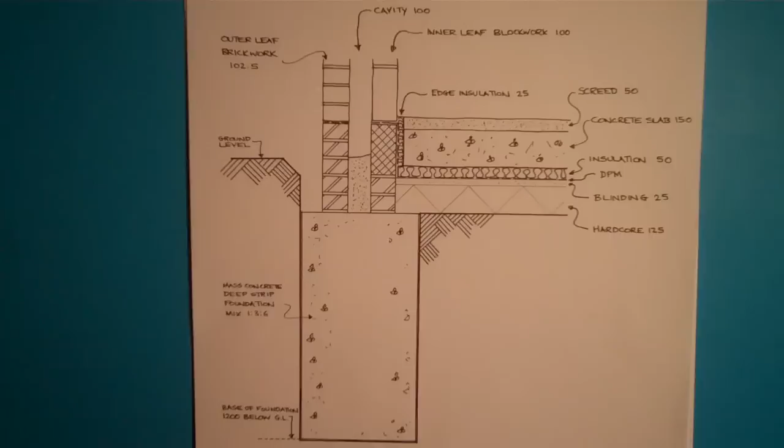Okay, I'm going to show you how to draw a construction detail which includes a strip foundation with a ground bearing solid concrete ground floor. It's going to end up looking something like this, but we're going to start off with a blank sheet of

paper, and the equipment that we're going to use, simply a scale rule, a pencil, a pair of set squares, and I'm going to use an ink pen later on just to ink in to make it clearer to view. It's also good to have a decent eraser to hand just to rub out pencil guidelines and so on.

So we're going to start by very simply drawing a horizontal line which is going to represent ground floor level. Now, set squares come in very handy for something like this because it's quickly possible to draw a nice horizontal line which is perpendicular to the edge of the sheet of paper.

So we can simply line up the edge of the set square with the edge of the paper there, and by sliding the set square up and down we can very easily draw a nice straight horizontal line. So that line effectively represents ground level. Now, for the purposes of this exercise, I'm going to assume a strip foundation 500 millimeters wide. So we're going to draw this to a scale of 1 to 10.

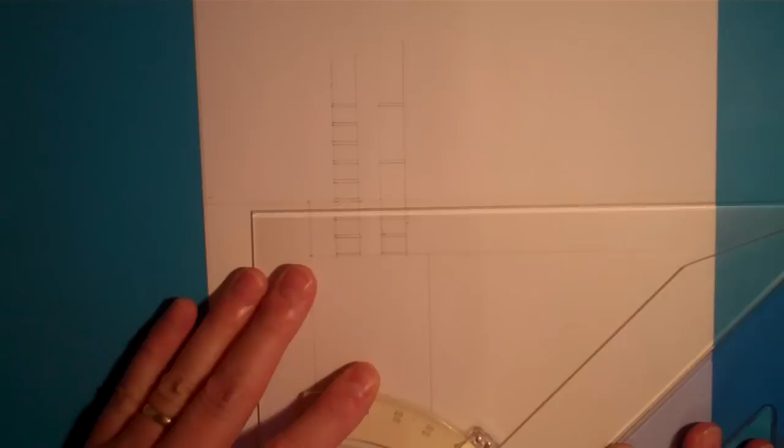From the point at which we strip the topsoil, I'm now going to add in a bed of hardcore, and I'm going to say that that bed of hardcore is 125mm deep and has got a 25mm blinding on top of it. So in total it's going to be 150mm made up of 25mm blinding and 125mm of hardcore. So we can draw in another horizontal line across there, like so, and there.

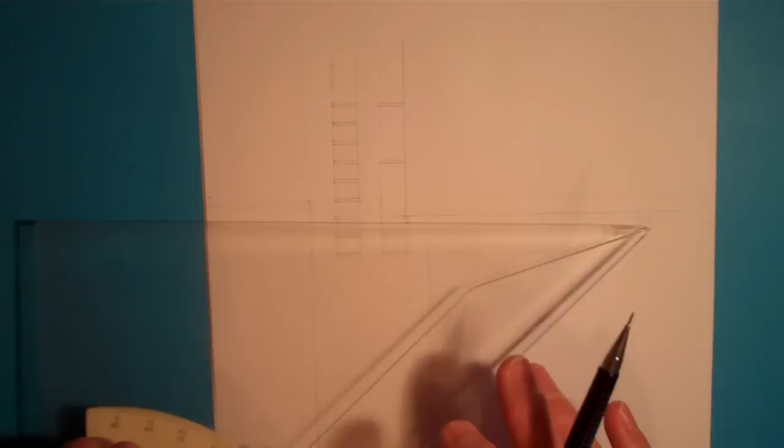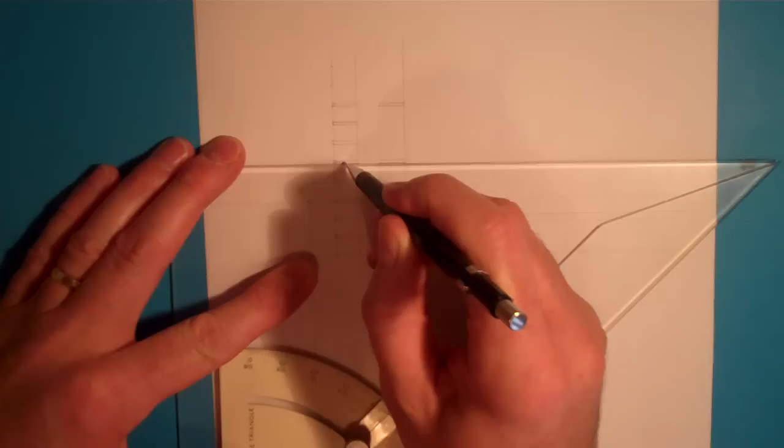Sitting on top of that we will have the damp-proof membrane. Now the damp-proof membrane needs to lap with the damp-proof course in the walls. Damp-proof membranes and indeed the damp-proof course are very thin, and we're not going to be able to accurately show the thickness of them. However, we can simply indicate their presence by a broken line. So I'm going to run a broken line through the middle of that bed joint there.

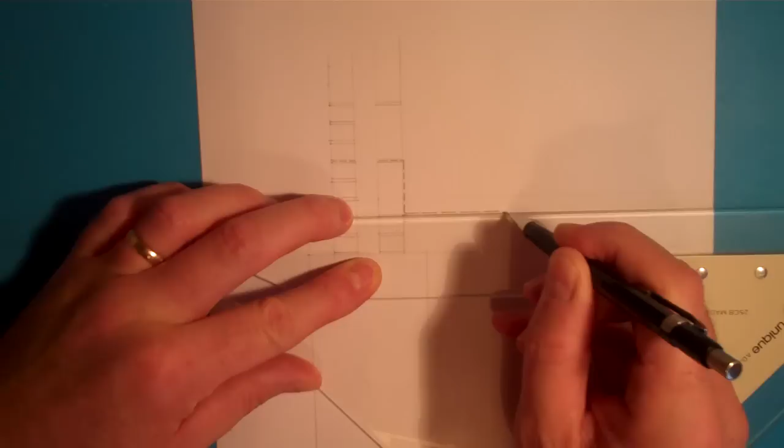So there's our DPC in the walls, and that laps with the damp-proof membrane, which will run up the wall there, and then across the top of the blinding to the hardcore. And the blinding actually provides a nice smooth surface for the damp-proof membrane and avoids the possibility of the damp-proof membrane being punctured as people walk around on the surface of it. So there's our damp-proof membrane.

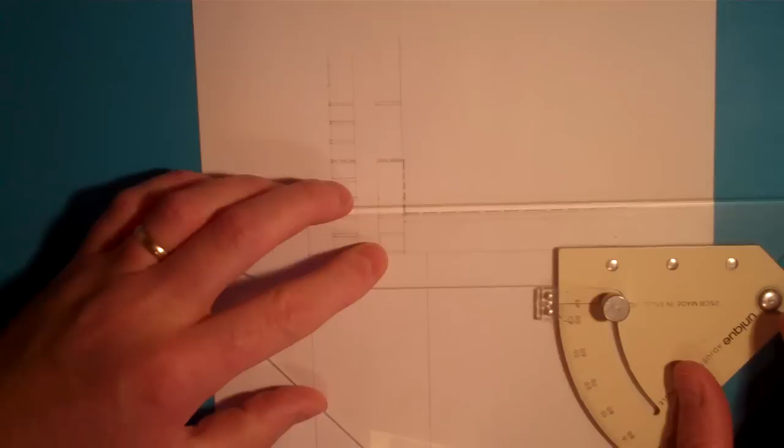On top of that I'm going to put 50mm thick of insulation. So again we can draw in a horizontal line which actually coincides roughly with our ground level line. We need to prevent a thermal bridge at the perimeter of the wall, so we should also have an upstand of insulation. I'm going to put 25mm of insulation in at the edge and draw a vertical line to represent the insulation coming up here.

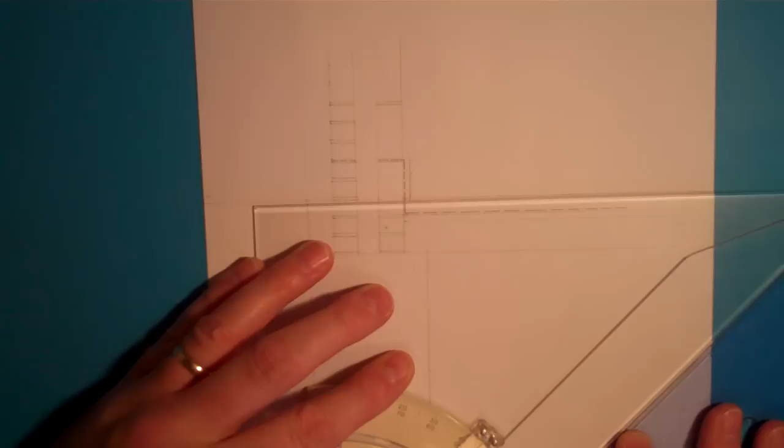And then I'm going to put in the concrete slab, 150mm thick. So I'll mark off 150mm there. And then there's going to be a 50mm screed sitting on top of that. So that takes us up to that point there. So 2 more horizontal lines. Takes us across to there. And there. So in actual fact we've now got in virtually all of our lines.

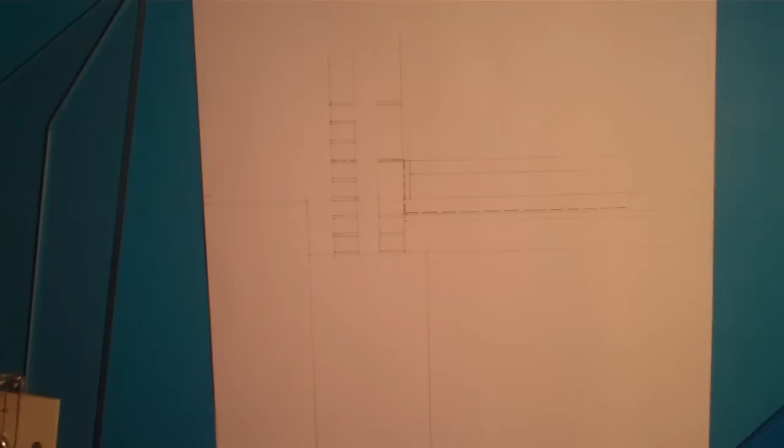We need to add in a couple of other items in between the outer leaf and the inner leaf of the cavity wall below ground level. It's normal practice to fill that section below ground level with a very lean concrete, really just a mixture of sand and cement. So we can just put in a line going across there. It's normal to slope the upper surface of that concrete fill outwards, so if any moisture gets into the cavity it's naturally drained away at ground level.

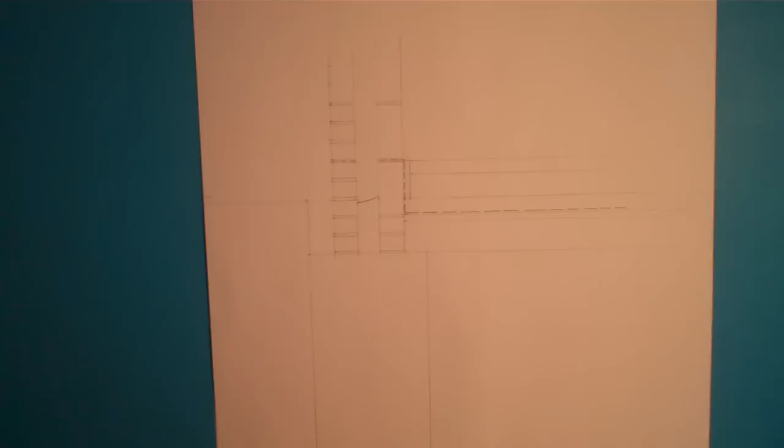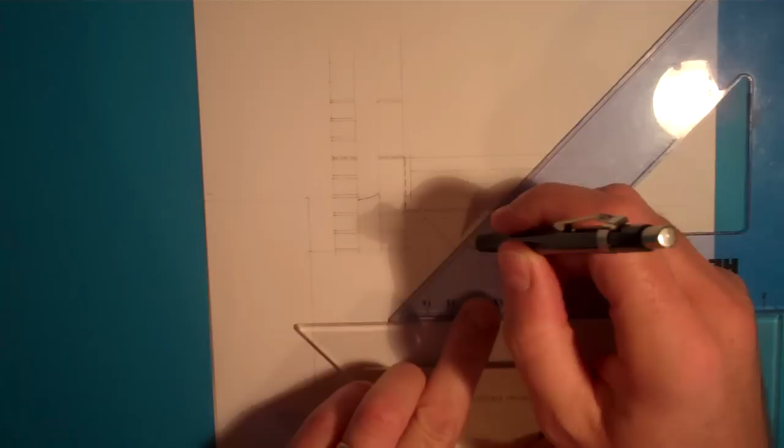And we're also going to put in a detail to show the hatching for the hardcore. There are several different ways of showing hardcore, but one of the simplest is just to do a series of 45-degree lines, diagonal lines in effect, like this. So we'll run a line up like that, and then from that point downwards like so.

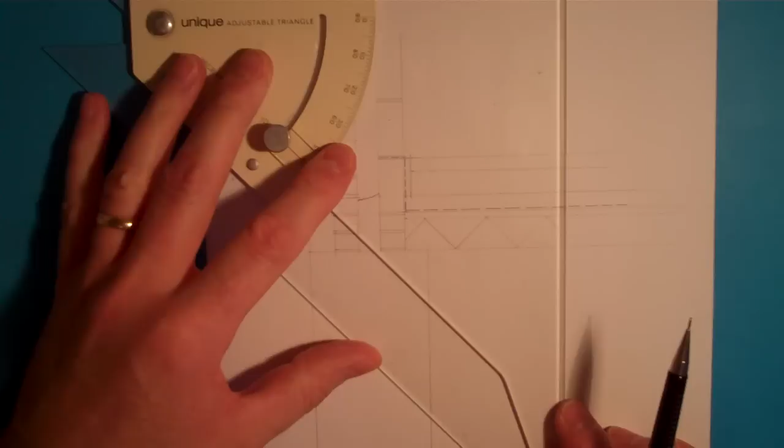Okay, at that point there I'm going to just draw a very rough vertical line coming down there, and everything to the right of that line I'm now actually going to rub out. That's going to leave me some space to add in some annotations.

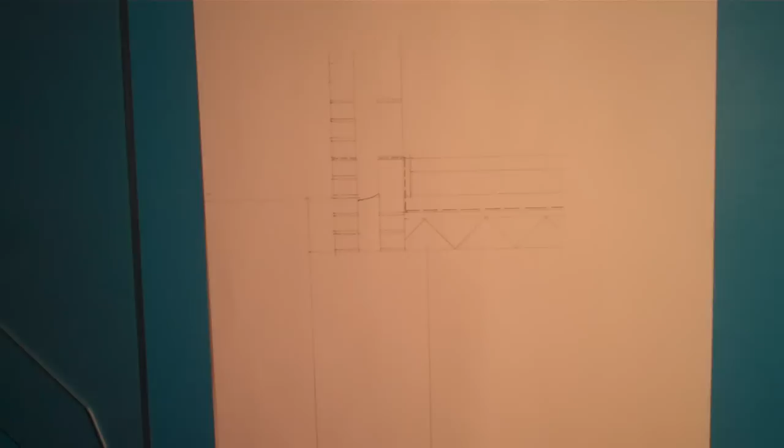And now what I'm going to do is I'm going to ink in the detail. I'm actually just going to do it freehand to save a little bit of time, but if you're not used to using ink, then you may just want to leave it in pencil, but go over it with a heavier pencil, but this will make it clearer for you to see. So here's our strip foundation.

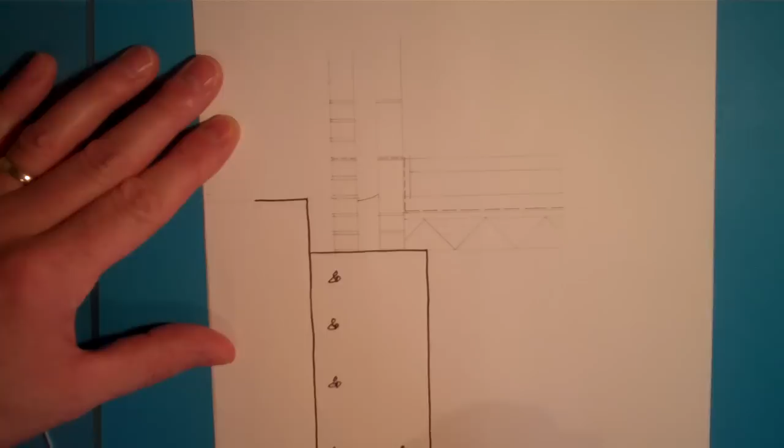Top of the strip foundation is 225mm below ground level. The graphical symbol to indicate concrete may appear a little bit random, but it simply indicates a mixture of coarse aggregate, the larger stones, and then fine aggregate. And that would be understood in most situations as representing concrete. As I say, it may look a little bit random.

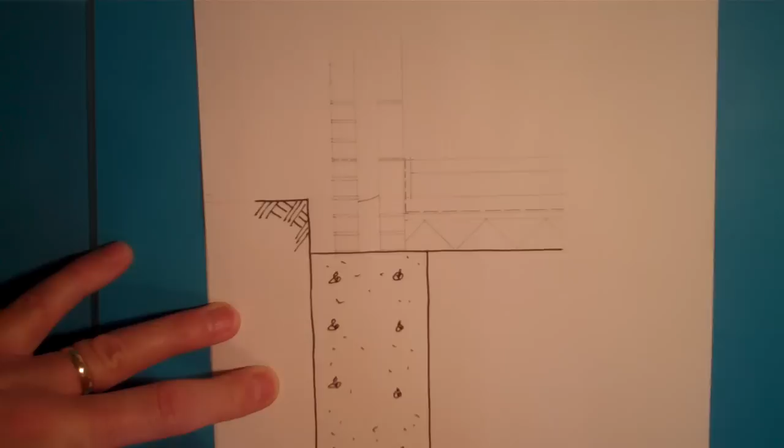For indicating the existence of soil, there is a standard hatching which simply looks like that. We can add some in down there, and people just can identify the fact that that's the soil beneath our detail.

Our wall can now go in. We'll just take it from that point there. The outer leaf in brickwork. Brickwork is 102.5 millimeters thick. We can show our 10mm thick courses like so. I say apologies if this seems rather crude, but I'm going to have to do it freehand, otherwise I'll be here all day doing it using a scale rule.

And the inner leaf of blockwork, and the blockwork courses are the same size as 3 courses of brickwork. But remember, at the base of this we've got 2 courses of brickwork, just to ensure that the courses line up. Our hardcore bed across there like that, the hatching for that, there's our hardcore, a sand blinding on top of that, which we'll just put in some dots to indicate that it's a granular material.

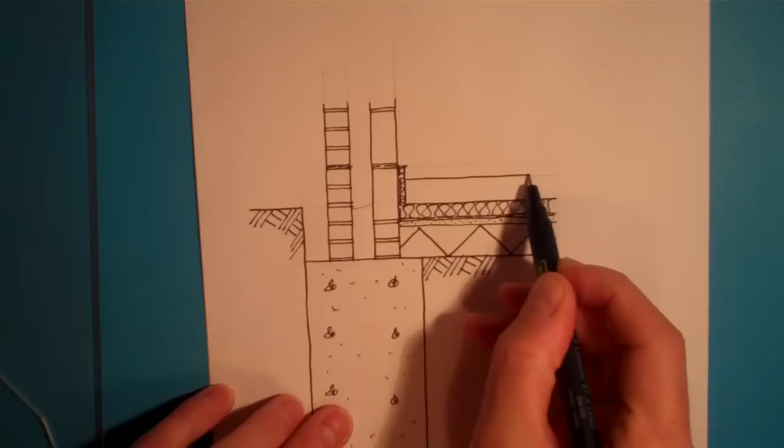Then our concrete slab, 100 millimeters thick, and the screed sitting on top of that. We'll use the same symbol here for concrete to indicate the concrete slab. And the sand and cement screed, which is literally just comprised of fine material, we'll just use some dots to indicate that. And in terms of the drawing, that's pretty much it. Sorry, I've got to add in that fill to the cavity below ground level. But that's pretty much as it would appear.

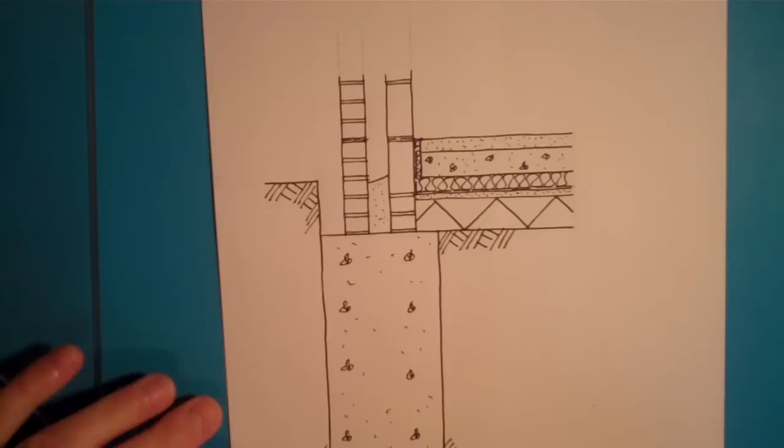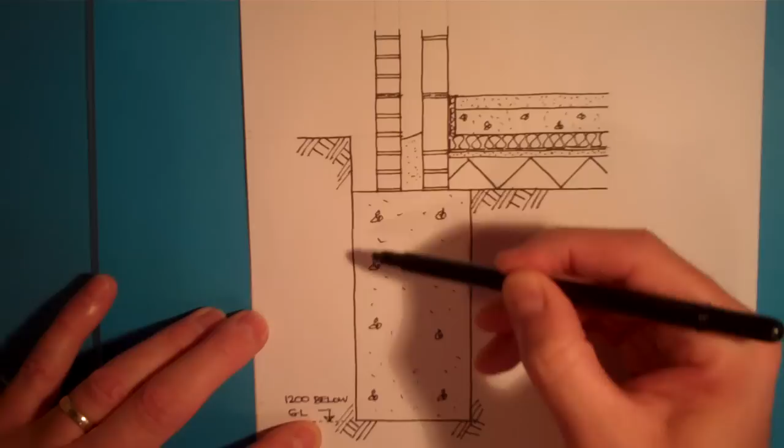I'm going to quickly add in some labels. The dimension for our foundation, the foundation we said was 1200 below ground level. I'll just put GL, a line across there, and that's the key dimension. It's not the depth of the foundation concrete itself, it's the depth of the base of the foundation below ground level. So ground level is represented there.

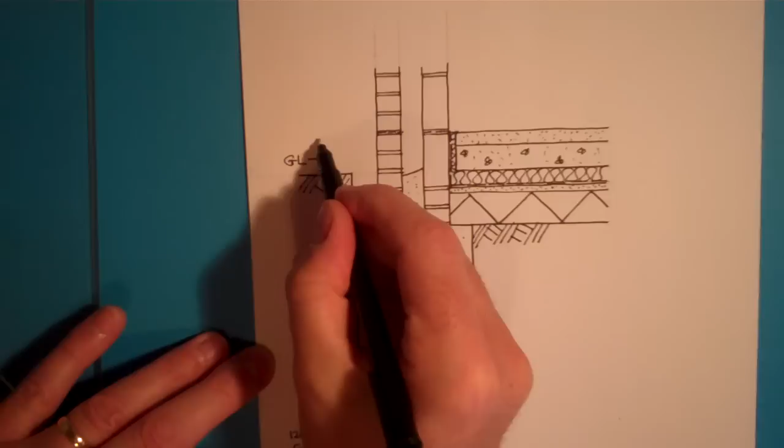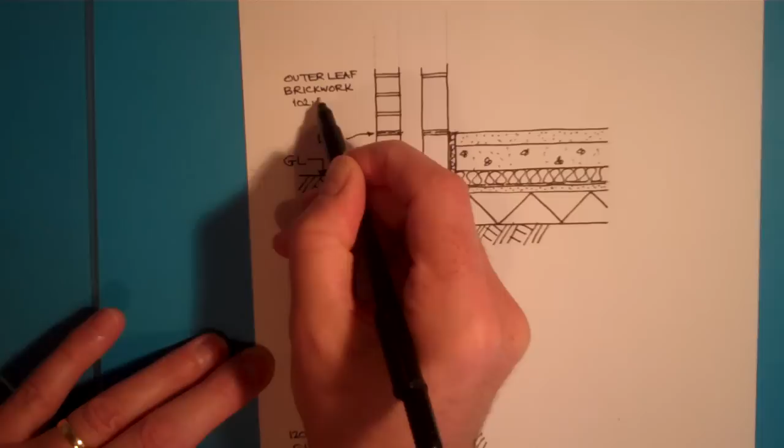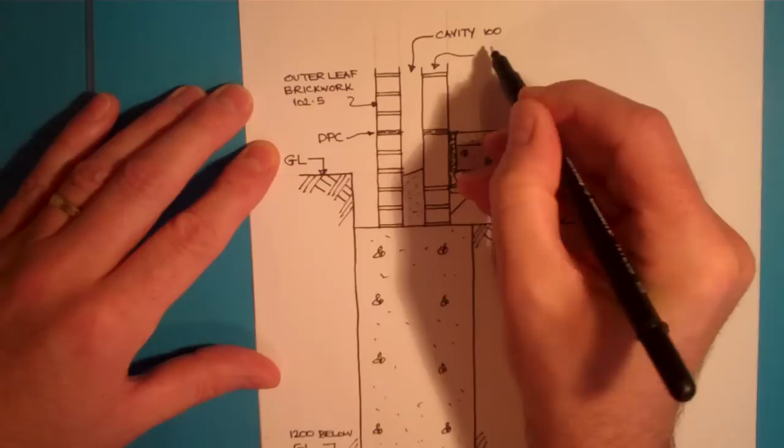We can show our DPC there. The outer leaf in brickwork, and that's 102.5. We've got a 100 mm cavity, and an inner leaf of blockwork, which is 100 mm.

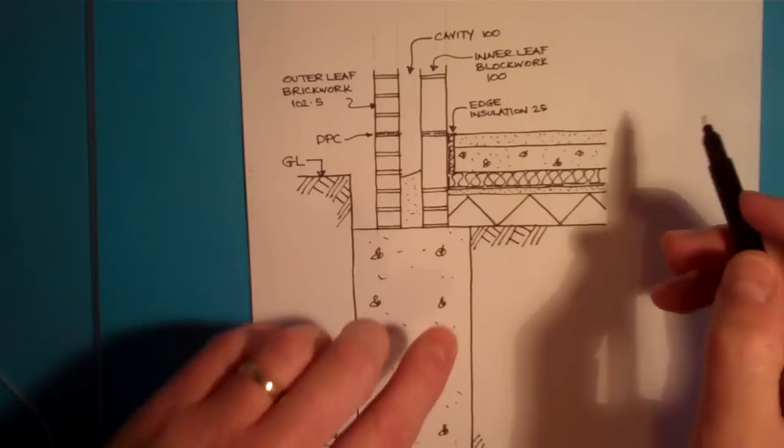We've got some edge insulation there. When you're adding labels you might want to use guidelines. I'm quite used to adding annotations so I can do it reasonably neatly, although it's not as neat as I would like because I am doing it rather hurriedly. That's our screed, which is 50 mm thick. Our concrete slab, which is 100 mm thick.

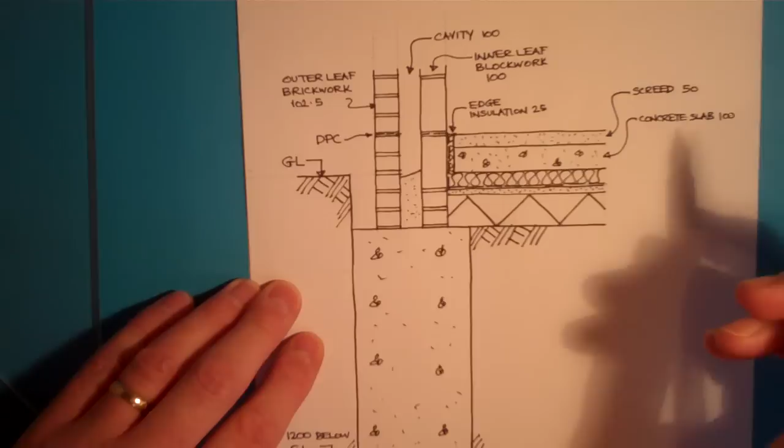Insulation, 70 mm thick. A damp-proof membrane, a 25 mm blinding, and a hardcore bed of 125.

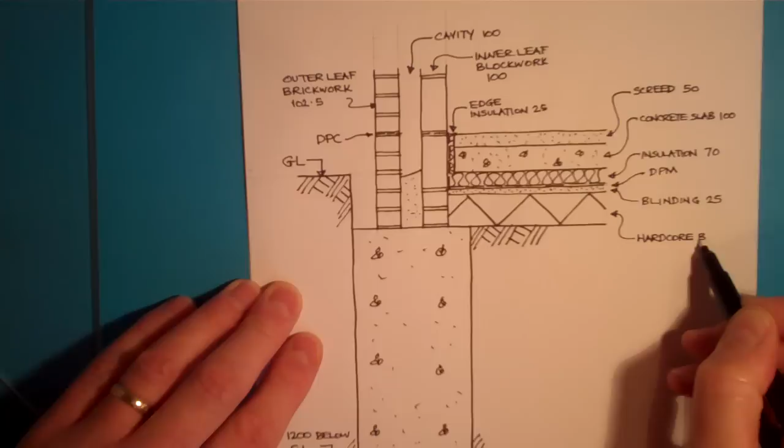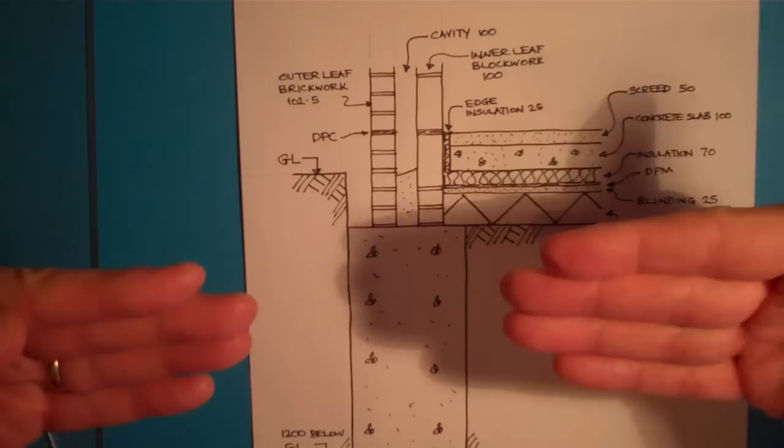Now ideally we should also add in some more specifications to those labels, indicating the mix of the concrete, the type of the insulation, thicknesses, materials used and so on. But just for speed really, I've just done a very quick detail, but that shows you the basic processes of producing a ground floor detail, which is a section through the base of an external wall, its foundation and its junction with the ground floor. So I hope that's explained it clearly.